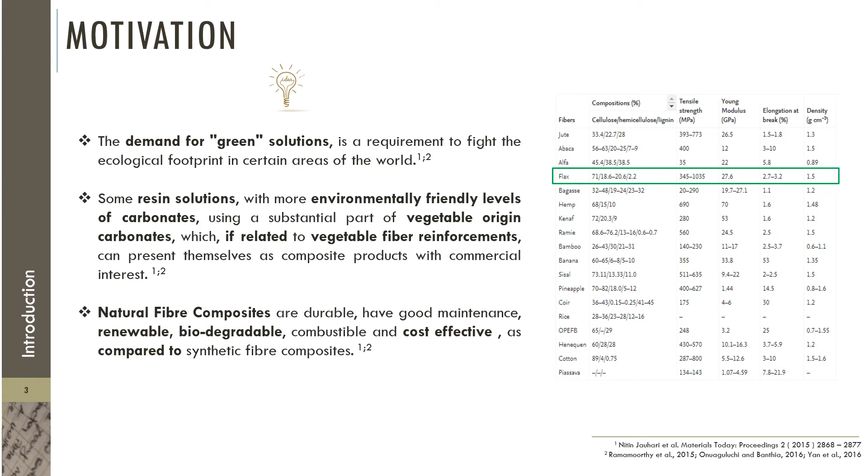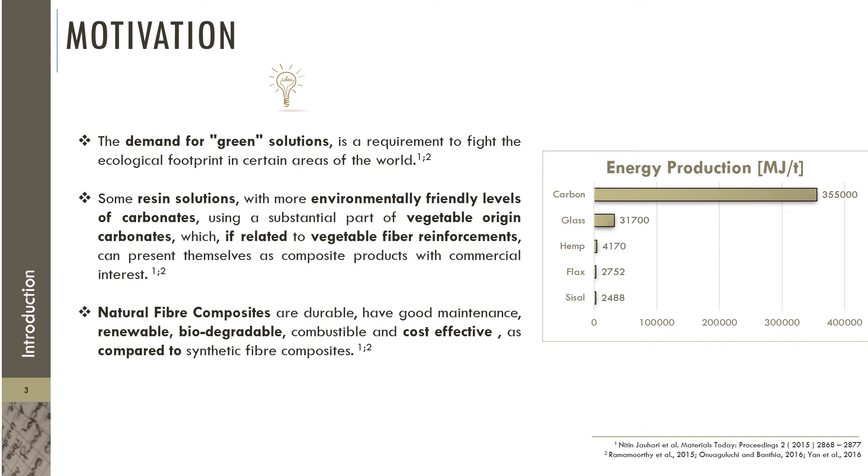The motivation for this work comes naturally according to the problems that society faces. The demand for green solutions is a requirement to fight the ecological footprint in certain areas of the world. There are some green solutions for the production of composites with resins using a substantial part of vegetable origin carbonates, which, if related to natural fiber reinforcement, can present themselves as a very promising solution.

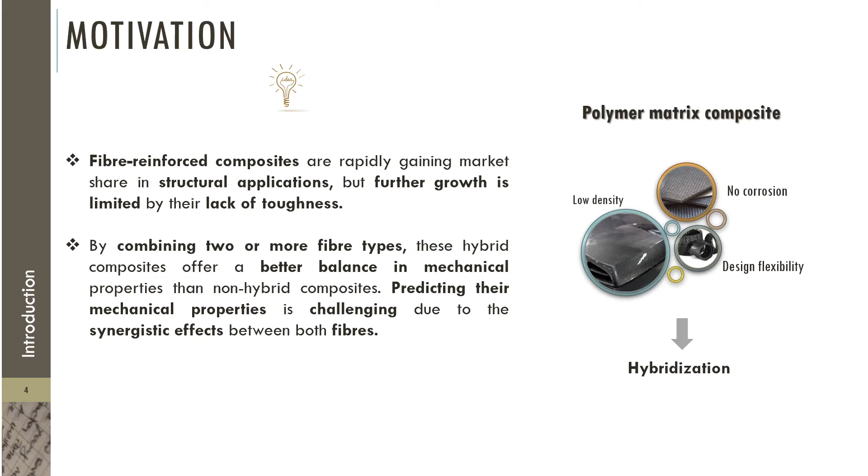Fiber reinforced composites, especially those produced with natural fibers, have a limitation in their use due to their lack of toughness. Therefore, the solution to balance the mechanical properties of the composite is to introduce a small amount of synthetic fiber. In other words, the hybridization of the composite.

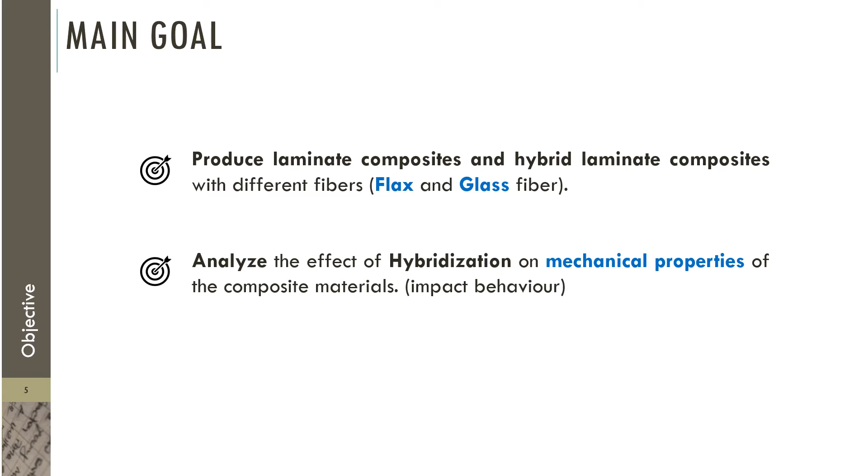So there are two clear goals in this work: the production of laminated composites and hybrid laminated composites, and the study of the mechanical properties of these composites, namely the influence of the hybridization on the impact behavior. These are the materials that we're gonna use in this work. For the matrix, we're gonna use a polymeric green epoxy, and for the reinforcement, we're gonna use a flax and a glass fiber, both bidirectional.

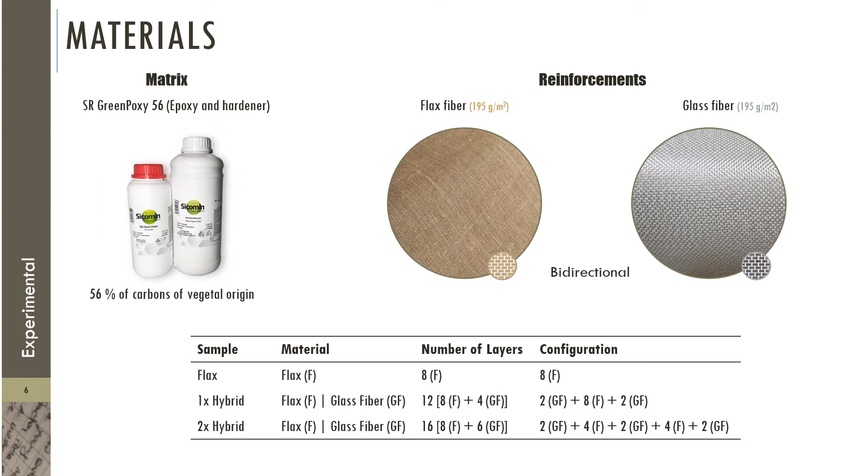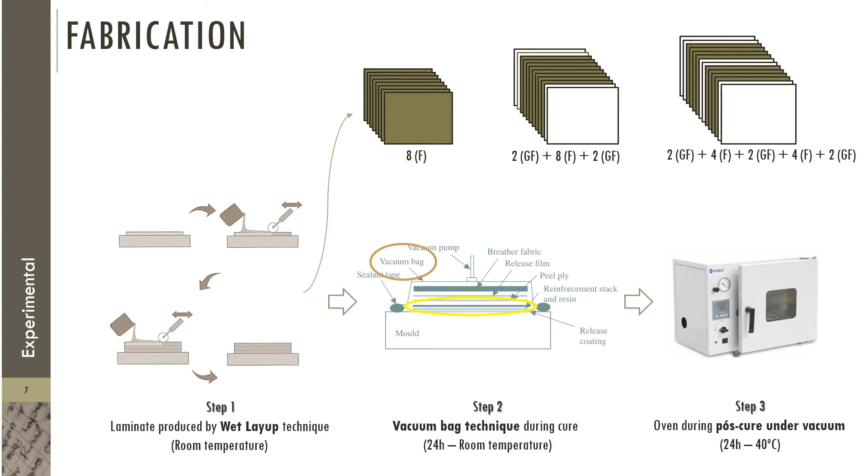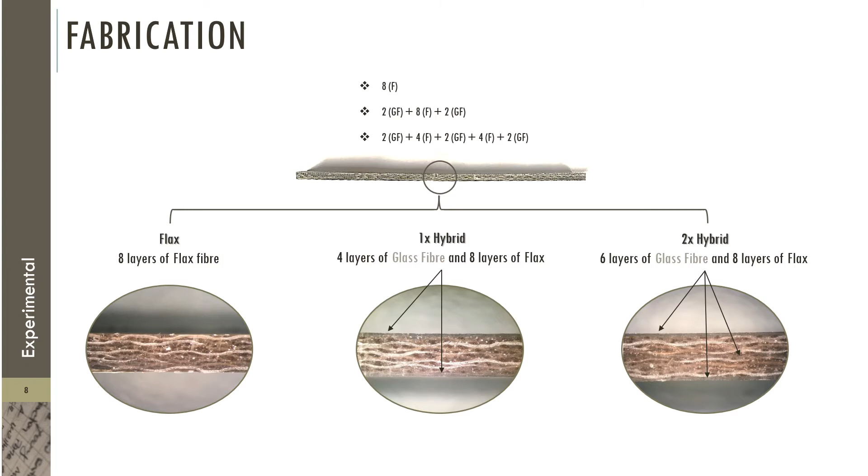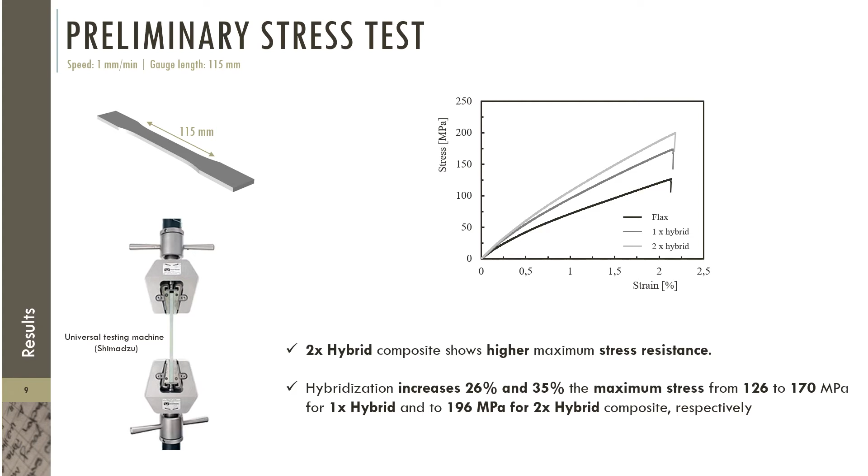The bending test results show us that 2 times hybrid composites present a higher maximum flexural stress resistance, and the hybridization can increase 74 and 88% of the maximum stress for the 1-time hybrid and 2-time hybrid composite respectively.

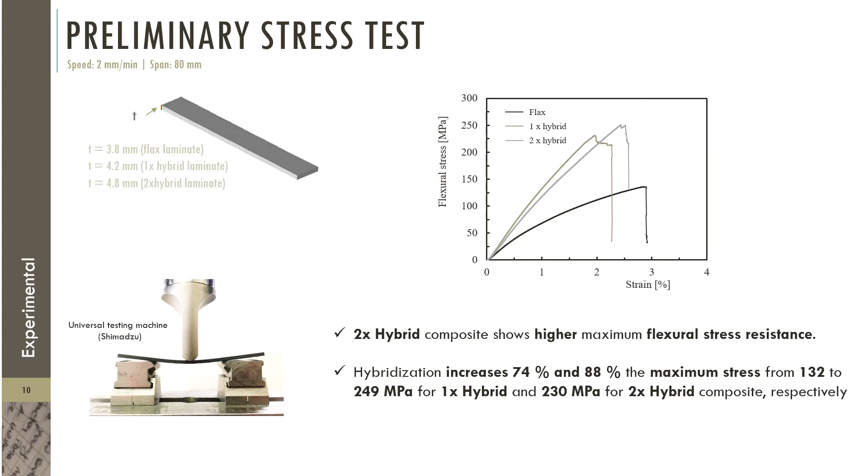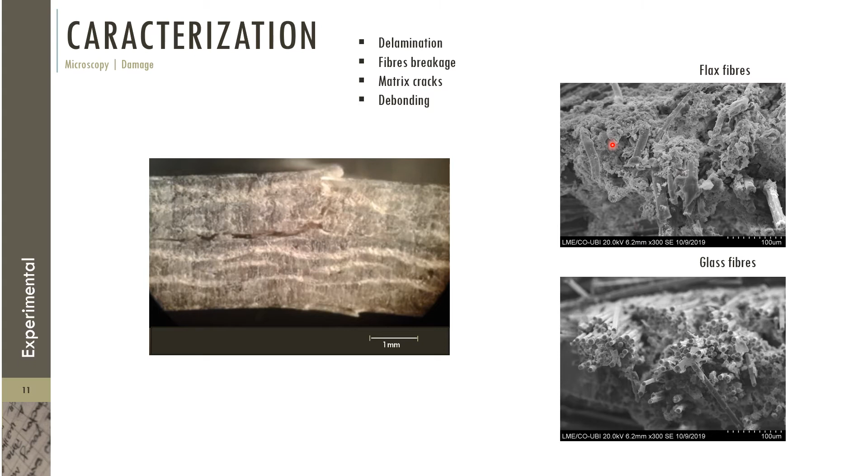The microscopic images show us the typical damages that we have in our composites. We can see that there are some delaminations and fiber breakage here in the compression zone. In this fiber breakage, we can see that there are some differences between flax fibers and glass fibers. We can see it in those images here on the right.

For the impact characterization, we use a drop weight tower to perform a low velocity impact. Here we can see the scheme of the samples used in those tests and their dimensions. The impact tests were carried out considering not only the different kinds of composites but also the different impact energies.

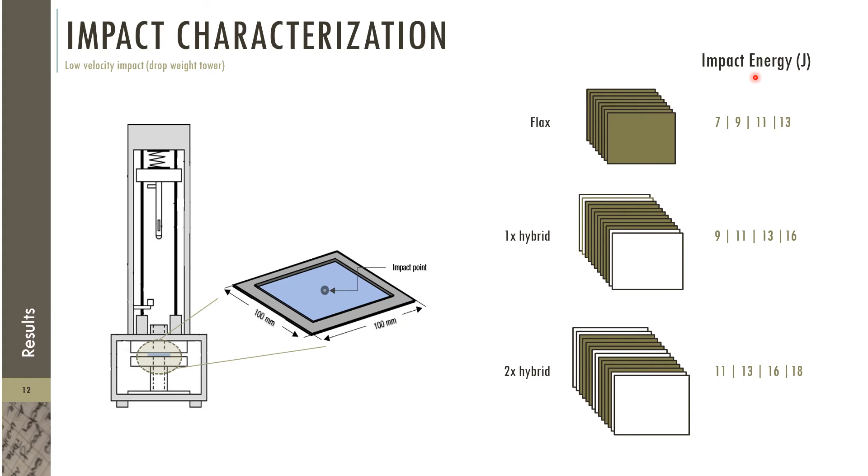In this slide, we can see the first impact results. The graphics represent a typical behavior that occurred for flax laminates under different energies, and we can see that the load and energy present the same behavior for all energies. The load and energy increase up to a maximum value, followed by a drop after the peak load.

The maximum load value represents the value that the composite laminate can tolerate before undergoing major damage, and this maximum load is very dependent on the impact energy. The curves on the left present oscillations that, according to the literature, result from the elastic wave and are created by the vibrations of the material.

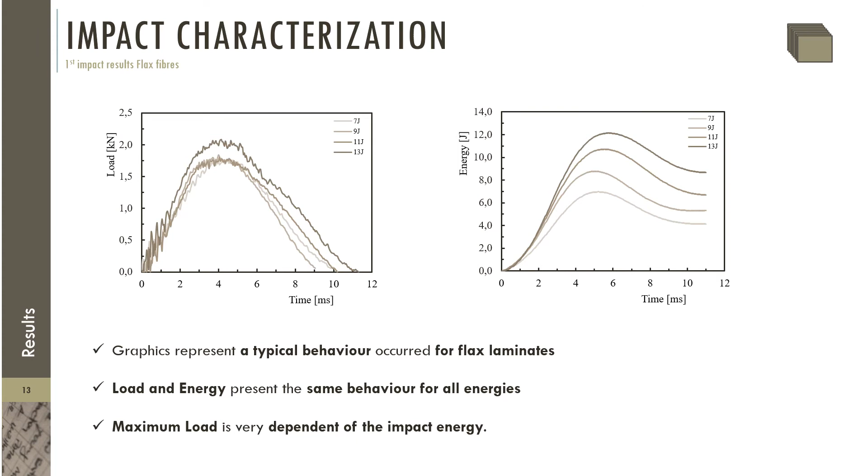The results indicate that load and energy versus time present a typical behavior for all laminates. We can see here in the load versus time graphic that the minimum average contact time was observed for the 2x hybrid composite, and the maximum contact time occurred for the composite with only flax fiber. We can also see that the absorbed energy decreases with the introduction of the glass fiber.

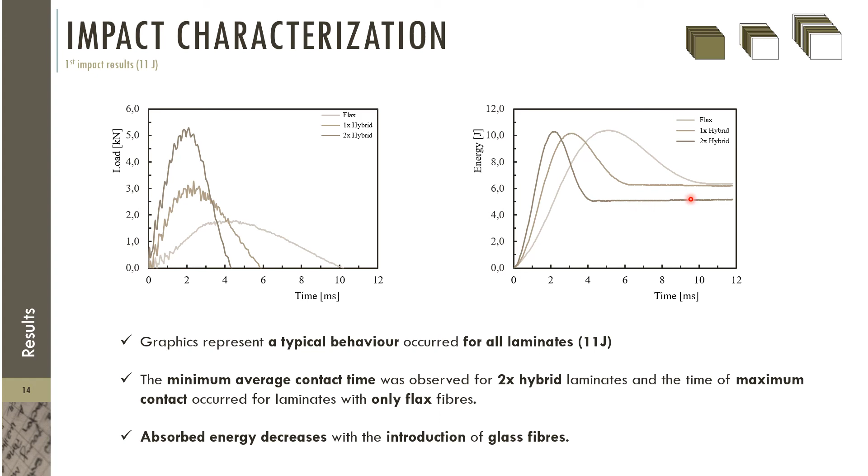In this graphic, we can see the number of impacts until the failure occurs for the different levels of energy. We can see that for the same energy values, the 2x hybrid composite presents higher resistance. We can see here for 11 joules and here for 13 joules.

We can also see that if we increase the energy level, we are decreasing the number of impacts, which means that the samples absorb a smaller number of impacts until the failure occurs. This is valid for all composites.

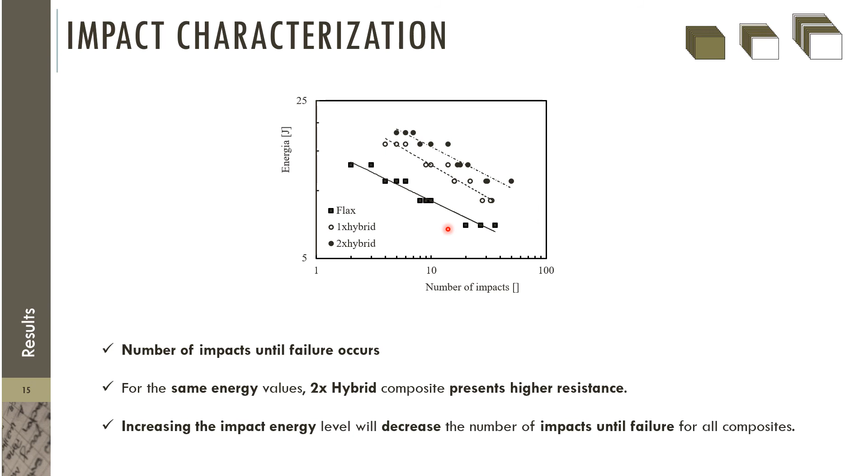So we can conclude that we successfully produced laminate composites and hybrid laminate composites with different fibers, flax and glass fiber. We can also conclude that the stress tests evidence higher maximum stress resistance for 2x hybrid composites, both for tensile and bending stress tests.

We can also conclude that the impact tests present us a maximum load dependence on the impact energy and hybridization. The minimum average contact time was always observed for 2x hybrid laminates, and the absorbed energy decreases with the introduction of glass fibers, which means that our composites present a higher stiffness for 2x hybrid laminates.

So we can conclude that the hybridization proved to be a good solution to improve impact properties, but this conclusion must be validated by a multi-impact characterization.